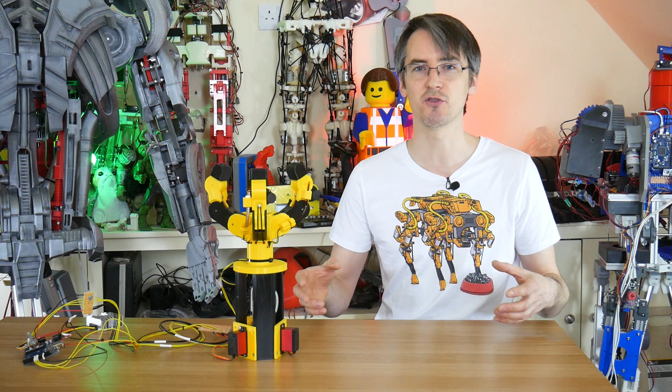In a previous episode I made this force-driven gripper which is going to be on the arm, but actually not this one because we need to do a redesign for various reasons, and check that video out.

Basically what we've got is a spring in between the servo and the finger itself. So as we apply more force, that spring stretches more. We measure the finger position with a flex stroke bend sensor, and we know the servo position, and that means we can work out how much force we're applying.

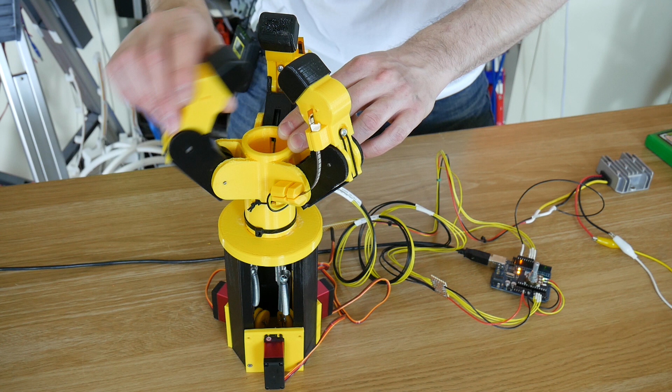We then turn that round the other way, so instead of setting the position and measuring the force, we actually drive the force, and that makes the joint compliant. So we set the amount of force, and if more tension is on those springs, it thinks there's more force, so that means we can back drive the joints and actually move them backwards, and the servos respond unless we turn the force up, and then they don't.

That's quite useful. It means we can measure how much force that's actually being applied to something, or we can set how much force we apply. So we need a bit of a redesign on that hand, but essentially this arm is going to follow those principles.

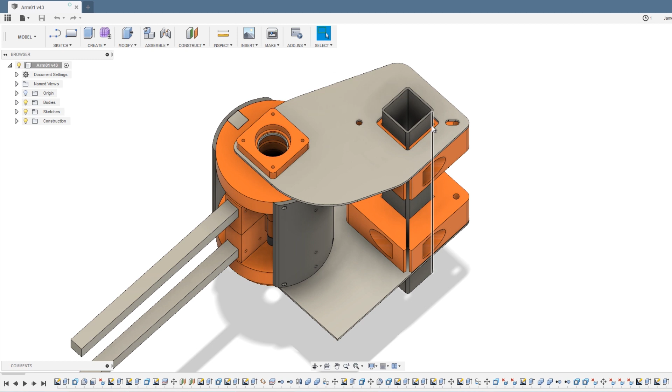My initial plan is to make a steel stand with a welded base, which is going to be 50mm box section steel, some 3D printed clamps that go round it that tighten up there to just hold it on with friction, a top and bottom plate which is CNC aluminium, and then have a shoulder hub we're going to build here, which is going to basically make the main compliance section.

But I'm not quite sure if that is going to be the shoulder, or if it's just going to be the elbow, or if it's going to be both, or how it's going to work. So first of all, I'm going to try and make this force controlled hub.

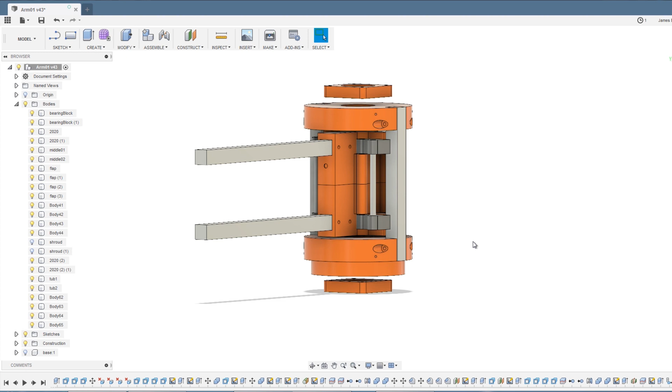So the plan for the main hub is that we've got this driven hub which is going to have a belt drive on it from a motor which will be fitted on there, probably a T5 belt, and essentially that whole thing rotates on bearing blocks which are attached to something. It was just shown on the plates, top and bottom. So those have got big bearings in, there's a shaft that goes all the way through.

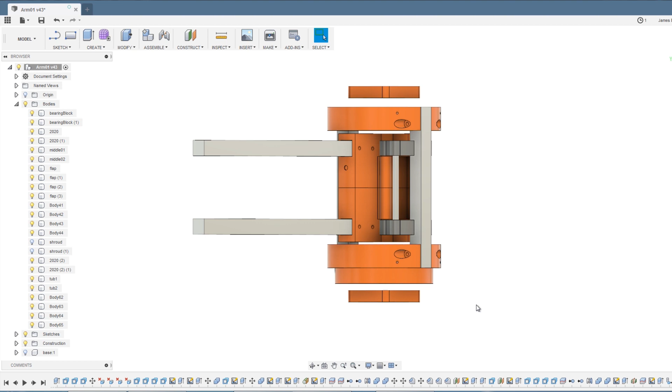And then the hub is made up of two main sections. So we've got a top and a bottom which are attached together with 2020 extrusion, and two shrouds which make that one piece, and then the internal part, and that rotates separately. That basically means that the internal can rotate separately from the driven part, and we can work out the force.

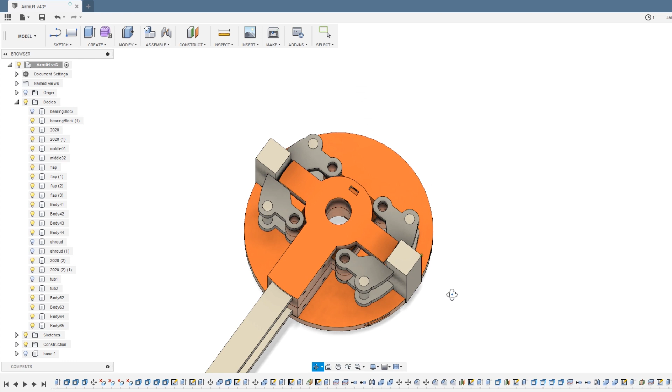But in order to work out the force of the inner part against the outer part, we need some sort of spring that springs it back in the middle. So we've got these fingers here which basically are sprung together, and those are attached to this inner part.

So that means they're locked together against this stopper, basically the big cross section in here, and also against the 2020 on the outer part, so that should keep everything central. But as the inner part turns against the outer part, either diagonal fingers this way will move, or diagonal fingers this way will move, and they'll pull outwards as this 2020 moves around. That means we can measure the inner position against the outer position, and work out what force is being applied.

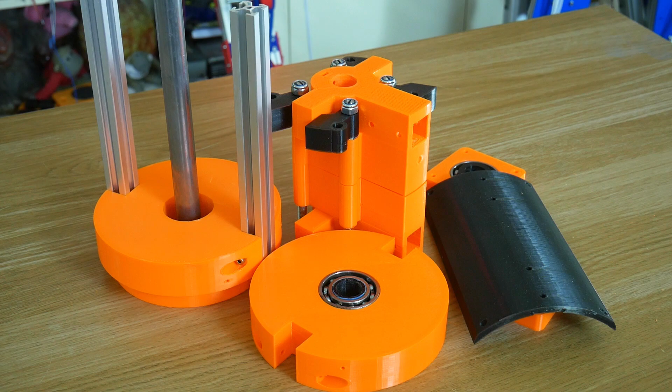So I've already partly assembled this. This is our top and bottom, so these have got bearings in. There's a tube that runs all the way through, and those will run on the bearing blocks, which are top and bottom on whatever it's mounted on.

So basically this whole thing runs on bearings. And then we've got the internal part, which I've already put these little flaps on, and I've got another 4 to put on the bottom, and that should fit like so. What will eventually happen is these flaps will be sprung together, with more studding running in those all the way down, so we can spring them together in the gap in the middle we've got there.

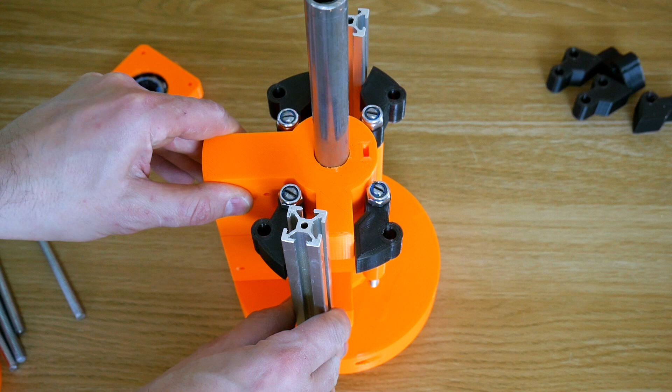And then basically that will hold this, holding the inner against the outer until we rotate it. If we rotate it one way, 2 of these will spring away, but they'll want to spring back. If we rotate it the other way, the other 2 will spring out, and those will want to spring back. So it's the same spring on each side holding those together, so we get the same tension, but the inner can rotate separately from the outer.

And the inner is actually fixed to this shaft, so we've got the place here for 2 grub screws, so we can make sure this shaft rotates. This sticks out of the bearing in the very top, so we can measure the position of the inner. The outer is going to be driven by a belt drive or something sat on the bottom - haven't decided whether it's a belt or a gear and a motor. We'll know the motor position, and then we can compare the two and work out the force, just like we did with the gripper.

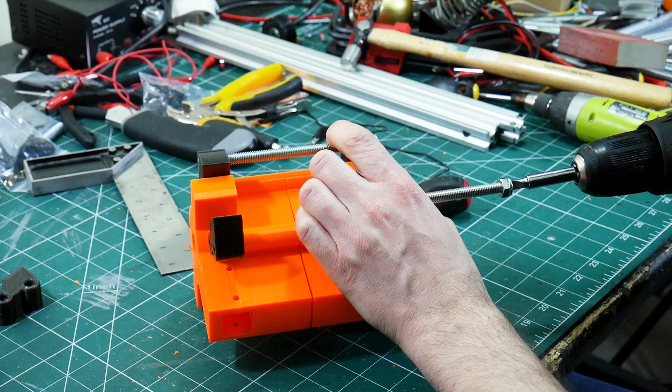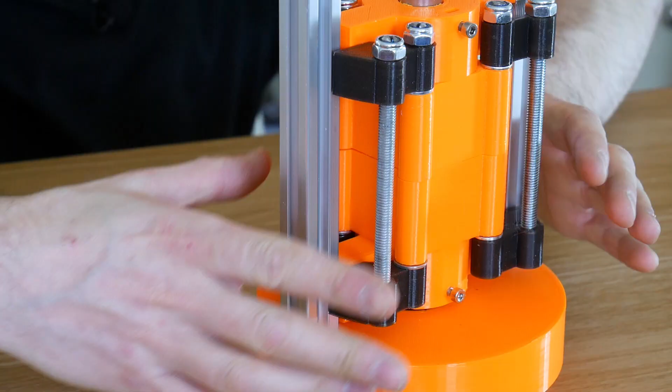So now the springs go between those things, and they go through that gap on either side to spring those together, and that locks everything. I've just installed some temporary springs either side there, just so those spring back. I've got some more on order. I think we're going to need more than 1 spring each side, which is why I've got so much space here, so we could put 2 or 3 or 5 or something in there.

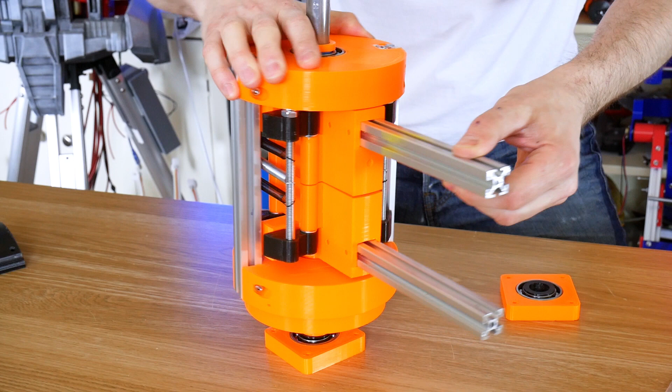So I've fitted all that together, and this whole thing will rotate, driven by a motor. That will move the main part of the arm around, but the internal turns separately from the outside, pushing those springs, and that's where we can work out the force applied, because as we push it more, the spring stretches more and gets tighter and tighter. That allows us to calculate the force by looking at the difference between the outer and the inner. So this is going to make either the shoulder or the elbow joint, and then we need another joint for the other part of the arm.

So I think what I'm actually going to do is back to back 2 of these. We've got this 2020 extrusion plugged in. If I just get 2 of these and stick them together, then we'll have the 2 joints. The only thing is the motors need to be fixed on what will be the stationary part.

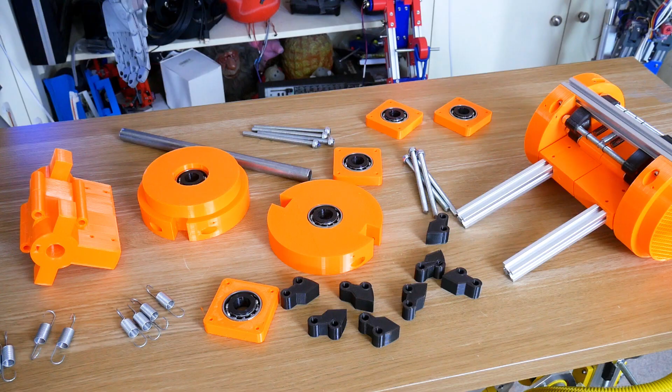So on the shoulder that'll be the main support, but on the elbow it'll effectively have the motor on the forearm, which will add a bit of mass. But I think it's a pretty rigid assembly. It doesn't have to be much longer than that really, so I think that's probably the best way to do it - it's another whole set of parts that needs assembling to make the other joint.

So now I've got 2 of those back to back with this 2020 screwed in there, and we can measure the load on each one there. We can measure the amount of force, because we've got these 2 hubs that turn independently. One is going to be attached to the forearm, and the other one is going to be attached to the stand.

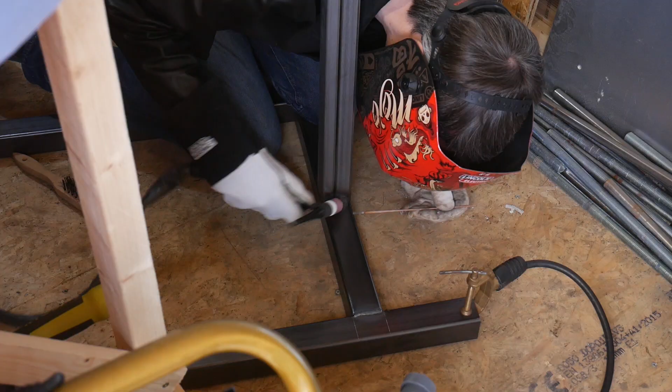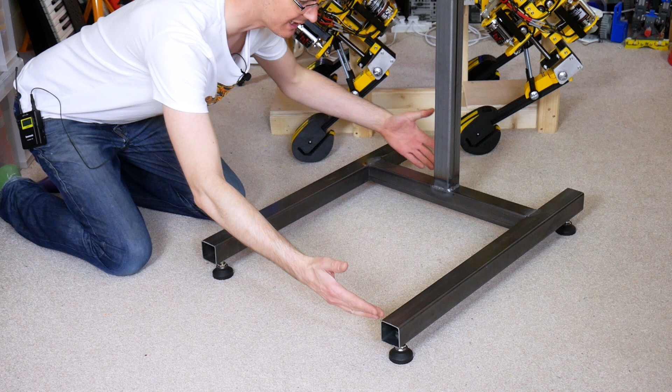Yes, I've made a giant metal stand. It's got 4 adjustable feet, so I can get it perfectly upright in case my welds aren't square, but I'm pretty happy with that, and some of my welds are looking pretty good now. Yeah, it's pretty big, about 5 feet tall.

I think this is a 1.5 meter thing, and it's off the ground on its feet, and that means we can put a table over here, and then the arm can go on here. Basically that means it can fish over the table to get things and so on, and it's on a sturdy base on the floor.

Now we might need some extra supports, another cross brace perhaps down here, but we'll see how it goes. Obviously that will have to be under the table height.

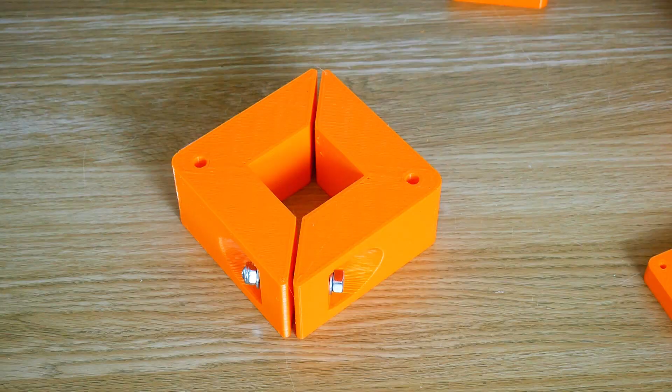So I've now got these which are split in 2 halves, and they've got some bolts that go through there, and that should clamp onto that upright. I've hardly done those bolts up, but those are actually quite strong, so that's pretty good.

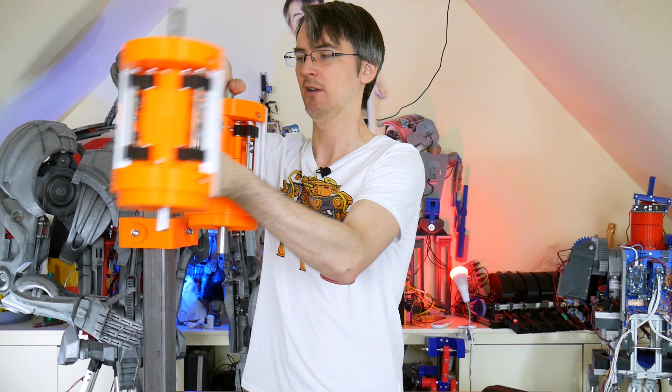And then of course this will fit in here, so this will be the shoulder, and that will allow quite a bit of rotation there. And then of course we need to put the forearm on, sticking off this piece here.

So what I showed in the original CAD were CNC plates, top and bottom, and I think that's still going to be true, but the configuration of those is going to depend quite a lot on how this fits on, which could just be a plate, obviously with the bearings top and bottom, but we've also got to get the motor in, so that needs to be mounted somewhere.

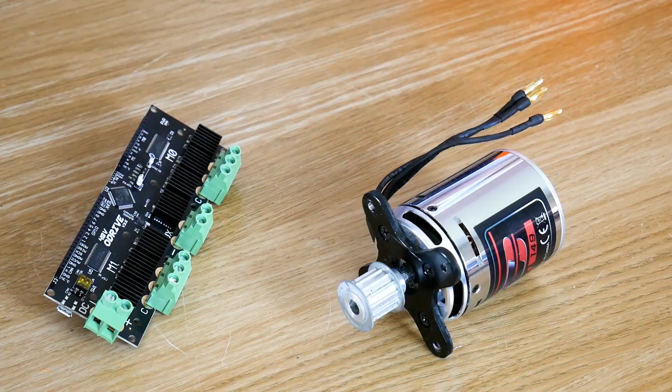In terms of motor choice, we're either going to use these motors that I used in OpenDog, which are the Turnigy SK3 range, the 6374 149 kV motor, but it's brushless, so we're probably going to need the ODrive and an encoder on each one. This is a dual motor driver, and that's good because we need 2 motors basically for those 2 axes. Obviously the wrist actuator and all that stuff will be sorted out separately.

So that's one choice. This is a 2 kilowatt motor, and it does go extremely fast. We're going to need some intermediate gearing if we do that, which might introduce more backlash.

The other alternative is this quite big DC motor with an integrated gear head, so we can just put a gear on there and run it straight on our main pieces of the assembly there.

So this one's from Gimson Robotics. They do quite a lot of different ratios and so on. This is a 71.2 to 1 ratio. Looks like a planetary gearbox.

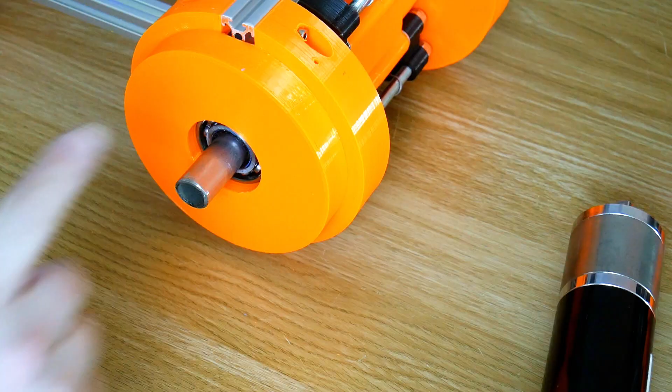Unfortunately, there's nowhere to mount an encoder. There's a little stump on the bottom, and I'm going to actually try and mount an encoder on the back and see how accurately we can control that, because otherwise it's going to be very difficult. So this is the place that I've left to put the pulley or the gear or whatever we have that goes to the motor.

So we'll have to mount the motor sort of like this or like this, and then basically have a pulley or a gear on there. It could be a pulley and a belt, obviously there'll be some stretch in the belt, or a gear or whatever that goes onto this.

So we could obviously put a piece on here that's much fatter, and I've just left this here so there's lots of space to glue it on. We can make it as big or as small as we want, and we can attach it to whichever motor, but obviously mounting this motor is going to be the tricky thing.

So I'm pretty happy with how that's worked out so far, and my lovely metal stand. Next time we're going to be trying to do encoder control of this motor and looking at the CNC mounts to put this on the stand, and talking about the forearm. Then after that we need to go and put the axis that goes up and down, that linear axis for the gripper, and eventually build a new gripper as well, which is also going to be force controlled.